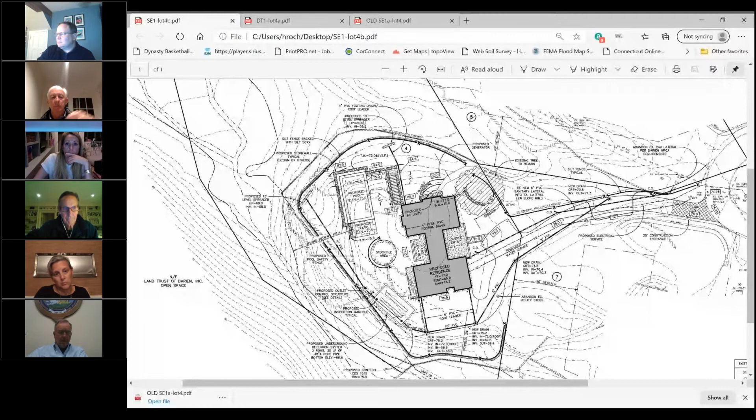But Harry Roachville, I see, is here. Questions? Hey, Harry, can you give us like a 2-minute on this? Sure. Would it help if I share my screen, or you just want me to go over it verbally? Well, if you could share your screen, it'd be great. Yeah, do I have that ability, Fred? Just give me one moment, Harry. Yep. Let me know when you can see it. You should have control. There you go. We can see it. Okay.

So essentially there were two changes, and actually I'll show the old one first. So there was an existing retaining wall right here. Can you see my cursor moving as well? Yes. So there was an existing retaining wall just north of the house, and they were proposing to remove portions of it, but as they got into the site clearing and investigated a little further, it was determined that wouldn't be the best idea. So the house moved 10 feet south, essentially parallel to where it was, to avoid having to remove that retaining wall. It didn't encroach, and I'll go to the new one. It didn't encroach on the upland review area at all. And it was just about a 10-foot shift.

And then the driveway, same thing, it shifted 10 feet with that. There wasn't any increase in impervious area for that same exact footprint. So the stormwater management system stayed exactly where it is, no changes at all. The other change was the pool shifted to the northwest about 20-25 feet. That was to better fit the existing conditions of the site after trees were cleared, and as you know, there's a lot of ledge out there. So it was found that if they shifted it that direction, there were going to be retaining walls proposed anyway, and they could use those retaining walls as a sort of double infinity edge for the pool as a nice feature for the property.

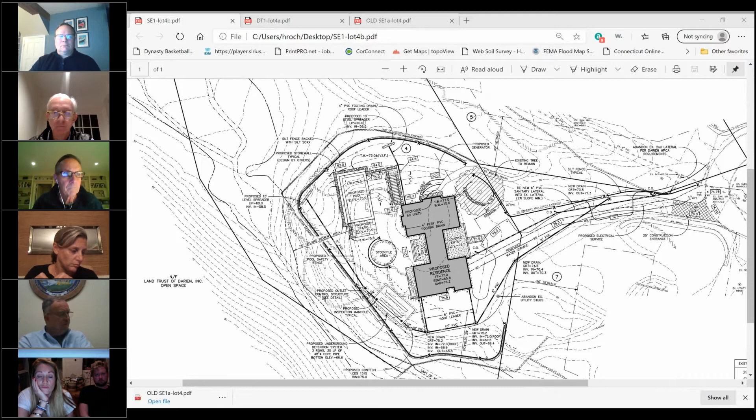Okay, Rich? Okay, now we're going to move to public hearing, EPC 2020. Megan Thornton and Eric Roemer, 49 Birch Road, proposing pool house and patio construction in the upland review area. The site is shown on assessor's map number 11 as lot number 11. The hearing was opened on September 2 and immediately continued.

Okay, is there a person representing the applicant? Yes, Jan Goshinsky, Enviro Protex. With me, I have Doug DiVesta, who's our civil engineer, and Alex Mock, who is our environmental scientist. And I also have the owners watching here too. So I'm going to take you through quickly what we're planning to do, and then if you have any questions, we'll be glad to answer them.

So the basic idea is to put a swimming pool there in the backyard. Their yard is divided by a stream, and a large pond is also on their property. The pool itself sits within the required setback lines. We're okay with the coverage. We're okay with the setbacks. So with any of the proposed activities, there's nothing we have to do with planning and zoning. There's no real regrading here, and Doug is going to take you through the civil engineering plan.

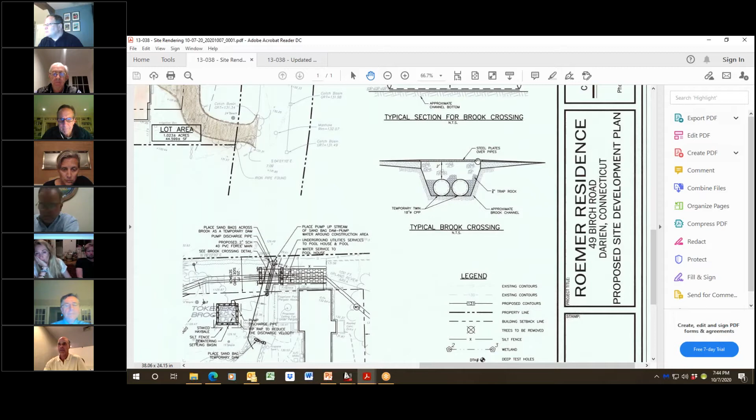Again, we're looking to construct a pool in the western portion of the site. To get there, we would have to cross the Tokeneke Brook. What we're proposing to do would be a temporary crossing, which we have details for. This is the temporary crossing detail, doing twin 18-inch pipes with stone around it and a minimum of 2 feet of cover over the pipes, and then a steel plate on top of that to allow the heavier equipment to go across it. So that's a section of it.

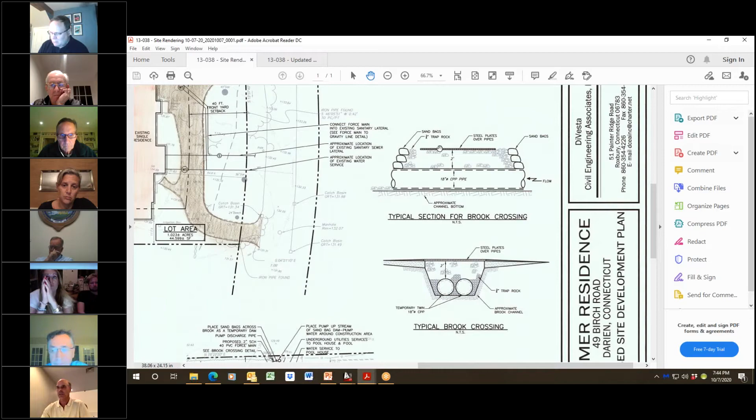This is a profile looking along the longitudinal, north to south, on the brook itself. Sandbags on the side to hold the rocks in place there. I think Joe made a comment about adding a geotextile fabric along the inside of here to keep the stone in place in case it does flood out on us. So that's a proposal that we certainly can do as a condition of approval and revise this detail for that matter.

So again, the pool itself is in the back western corner of the site there, with minor regrading to get the pool level, using a boulder retaining wall here, about 1 to 1.5 feet high, to keep the grading from going out and closer to the wetlands.

In terms of drainage, we are looking to put channel drains on each side of the pool patio area and around the pool house that will all go into a Cultec system. Before it goes into it, it goes to a junction box with an open bottom that will allow any sediment to settle out for cleaning purposes. And this will also handle the 2, 10, 25, and 50-year design storms, and also handle the water quality volume for the impervious surfaces from the patio, the pool decking, and the pool house itself.

In terms of erosion control, we're showing double row staked silt fence with hay bales right along the wetlands line. Also, we're providing silt fence on each side of the brook itself with an anti-tracking pad leading onto the existing driveway. And then during the weekends and storm events, we put hay bales across the entrance to the construction on both sides to mitigate any potential erosion towards the brook itself.

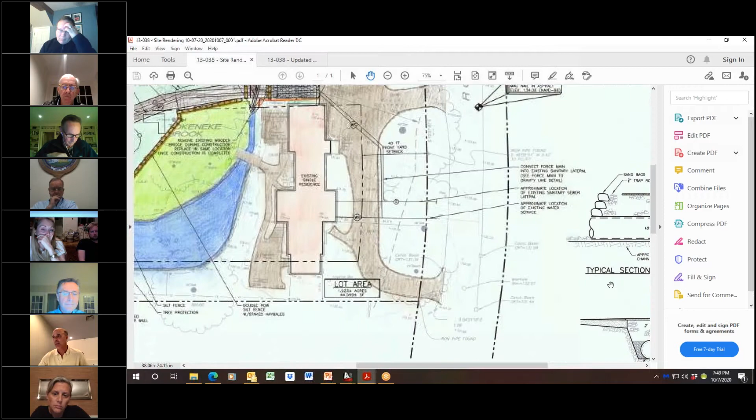Then Joe had asked us about the crossing and to design it according to the ConnDOT drainage manual for temporary hydraulic facilities, which we did, and that goes back to our details here, and those details follow those requirements. We also looked at the design of the flow. These are twin 18-inch corrugated plastic pipes, and we looked at the flows going through there based on the design manuals for our 2-year design storm.

The 2-year design storm flow is, one second, let me check my numbers. The 2-year design storm is 2.9 CFS. One of these pipes can handle 12.5. You put twins in there, you can handle 25 cubic feet per second. So we've got plenty of capacity to pass the 2-year storm.

We also looked at the 10, 25, and 50-year design storms, and each of those storms can pass through the twin 18-inch pipes there. Again, it's only temporary, it's only there during construction. Once the construction is over, that will be removed and the area will be restored back to its existing conditions.

Joe also had asked us to provide a location for the wooden bridge that's there right now to bring in lawnmowers and things like that to access the backyard for cutting the grass. We showed a temporary storage area for the wooden bridge during construction, and that bridge will be brought back to cross the brook itself. So that pretty much addresses Joe's comments.

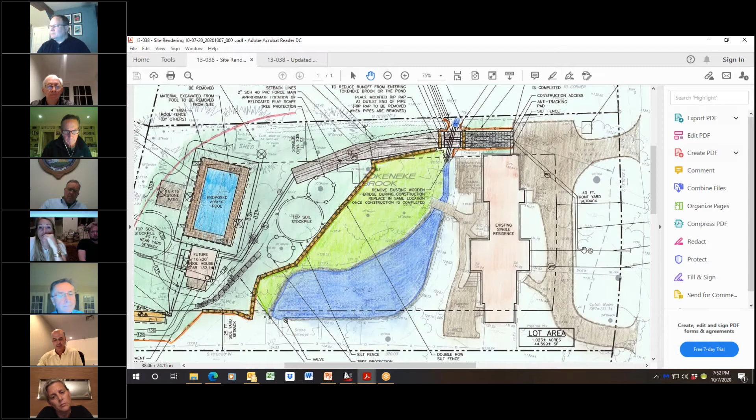We included the utilities, electric and water service to the pool house, and connected that to the existing utility services. We removed the retaining wall we originally had on the plan and provided a lower boulder wall, and just slope down to the top of the wall on the south and east side of the pool itself. We added additional tree protection around this 20-inch maple.

We also added a second stockpile area. We had one on the east side. Now we added one more on the west side, just due to the amount of material that would be stockpiled there temporarily during construction, mostly topsoil to replace back where it's being disturbed.

We added the second row of the detention system to help provide the water quality volume, as we just talked about. So that pretty much addresses Joe's comments and goes through the changes that were made in the plans. And I think we'll have Alex give us a little presentation regarding the environmental assessment of the property and the proposal here.

Alex? Good evening, this is Alexandra Mock. I'm a wetlands and soil scientist, also a landscape designer, and I would like to discuss wetlands a little bit. This is a wetland watercourse corridor associated with Tokeneke Brook. This area is highly manipulated by past human activity.

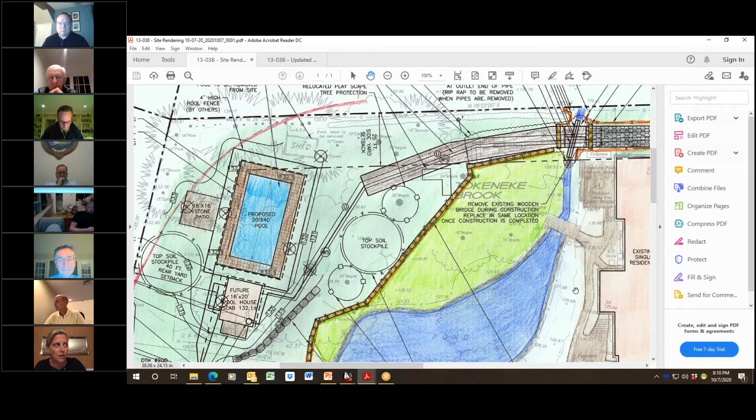Okay, please go ahead. So I just had a question on the utilities now being installed, now that we see the sewer main and the water. How is that going to disturb? Because I understand the access point and the temporary bridge, but the sewer lines are not temporary. So what steps are being taken during the installation to preclude sediment and unnecessary disturbance in the wetland? I understood Alexander's point on the plantings afterwards, fortifying the bank, but I'm just curious what the impact is on installation.

Is this the question for me? Probably Doug will be better to explain, but there will be two types of addressing issues. When the utilities are going to be dug into the channel, there's going to be a sump pump, which is going to be taking the water from the northern end of the bridge or crossing. The water is going to be sucked out clean, and then a pipe is going to take the water to the other side of the crossing, and the water is going to be discharged there.

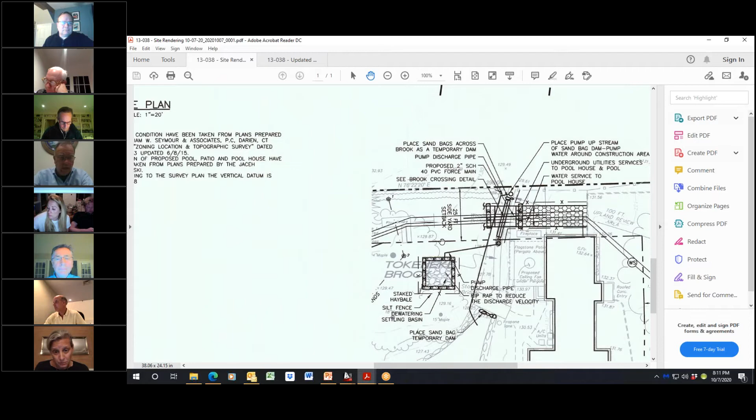So the water is not going to be flowing through the disturbed area, it's going to go around it. This way we can maintain the good quality of water while we're doing this whole disturbance. Right, thank you. Okay, thank you. Anybody else from the commission? Okay, Joe? Wait, whoa. I have some questions, Eric. Okay, please, Gunnar.

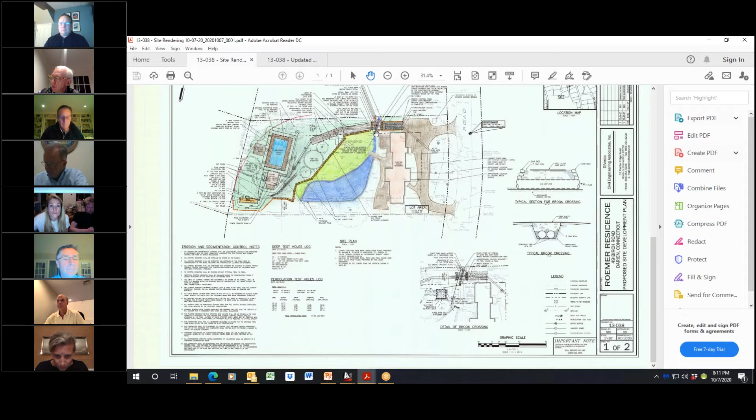So where the bridge is, and you're going to be going across that bridge, does that typically in a big storm totally overflow, or is it adequate enough to handle the water flow? Even in a storm condition? It was designed based on ConnDOT's hydraulic temporary crossings. It was designed for a 2-year storm, but we also checked it for the 10, 25, and 50-year design storms, and the twin pipes in there have the capacity to handle up to a 50-year design storm and beyond.

Okay. I don't know if we're at this point, but I have a question. Have you ever considered, instead of putting the future pool house where it is, relocating that up to the 16 by 16 stone patio just on the west side of the proposed pool? The reason being to get that further away from the wetlands. That we can't do because that would be within the building setback lines. The pool and the pool house have to be within the building setback lines, and that would be outside the building setback lines. Okay.

I know we've already talked about the pond, but has it ever been dredged? Is there any history that it has been dredged at any point in recent history? I worked on this project back in 2013. At that point, the pond had not been dredged either. So for the last 7 years that I've known, it has not been dredged. The owners are on this call as well. I'm not sure how long they've lived there, but they may be able to give us an idea if it's been dredged since they've been there. I don't believe it has been, but we can ask them.

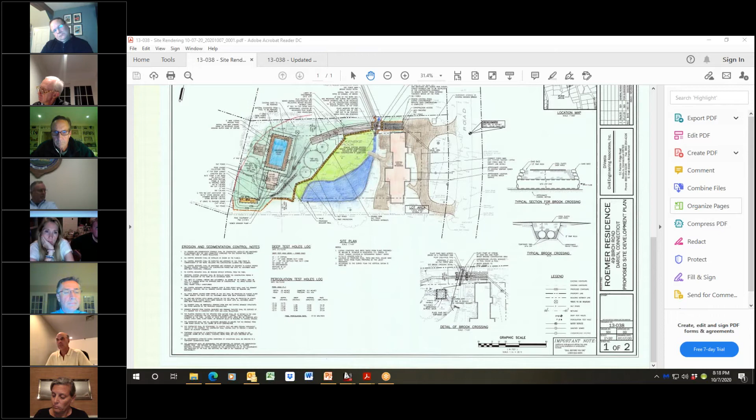Yeah, the building violation has been resolved. There are no zoning violations. The subject of the application is to keep a section of terrace that's shown in gray, but that is not a zoning or building issue. That's an EPC thing. Correct. It's being requested to maintain it as part of this application. It was built, I think, when the fireplace was built, or in the same general time frame. So the answer is there are no building violations or zoning violations.

Does that answer your question, Michael? Yes. My only other question is, is there an alternative to pass the utility and the sewage ejector lines without going through the pond or the outlet at the northerly boundary?

There is no other way to get the sewage over there, nor the water over from the east side to the west side. This commission has approved in the past crossing brooks and water channels like this before. The most current one would be over on Valley Forge. We had a force main going under the brook from that pond there out to the septic area in the back of the property there.

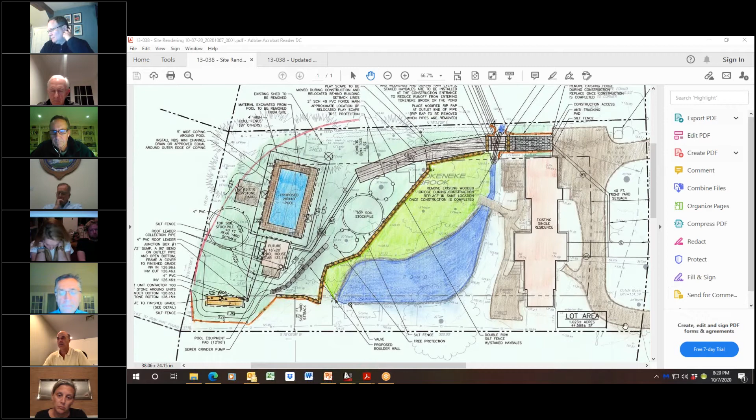So this is something that's not unusual, and all precautions are made as discussed with my detail on the plan and what Alex talked about, by damming up the water, pumping the water around during construction, and keeping the crossing dry during construction itself. So this is not something that this commission has not seen nor has not approved before.

Out of curiosity, is that for an accessory structure in a pool or for a dwelling? That was for a single family residence. Again, it's sewage, whether it's coming from a pool house or coming from a residence, it would be the same. I mean, that's all I've got. I'll jump in, I'm sorry.

I was going to say that the pipe is pressurized and it's encased, so it will not leak. It does not leak. I mean, there are pipes throughout the whole town that are pressurized. Not everything flows just downhill, so it's not, again, something unusual. It's pretty good construction.

Oh, I think there was actually, just jump in one last time. Maybe Jim had mentioned this, or Gunnar, is whether the pool house was planned to be constructed now, or if that's something for later. Okay, so let me explain that. So the idea here was that we would use this temporary crossing to do all heavy construction and build a pool, the deck around it, bring in all the utilities so they can actually use the pool.

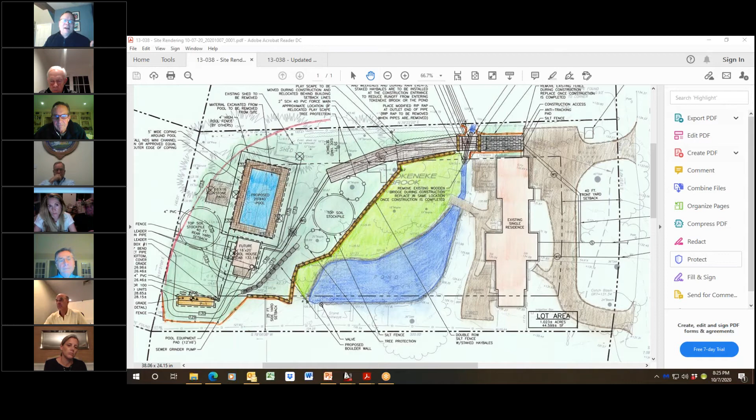I did request that Doug add an additional 2 feet of stone on top of the pipe, just to make sure that they do have the strength, so that the load as the construction vehicles pass over it is distributed to the ground below it instead of directly on the pipe. I saw a situation in Danbury once where there was an insufficient amount of cover over those pipes. There wasn't enough stone over it, and those pipes started to deflect, and they could collapse. But 2 feet for this size of pipe is certainly sufficient.

The DOT guidelines specify based on what's called the design risk, which is the procedure that you develop as part of the design of this, and for the time that this would be in service, a 2-year design storm is appropriate. But as Mr. DiVesta said, it does pass the 50-year storm, which is great.

Also the utilities, that was something else we had a concern with. Those are encased in concrete, which again is a typical detail to prevent any sort of seepage. So that's in accordance with standard engineering practice. So that said, the applicant satisfied our comments on the stormwater and the erosion control.

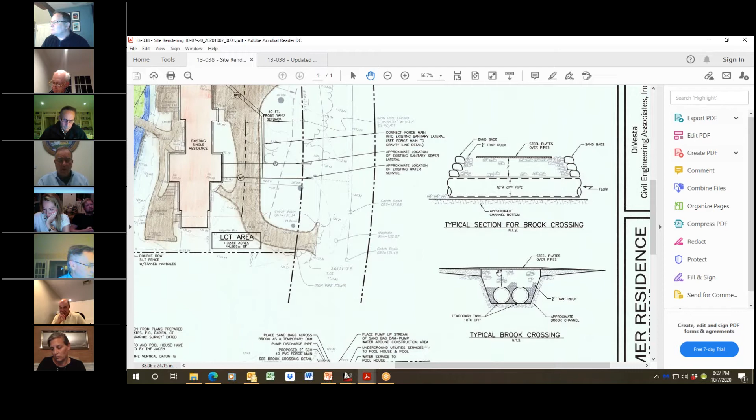Okay, hey, Joe, can I ask you a question on your point 6, page 3.6 of your letter? Yeah. You say stream crossings are also subject to the jurisdiction of the U.S. Army Corps of Engineers, et cetera. And the electric, because what Doug DiVesta referred to at Valley Forge Road was essentially water, which is not electricity. Okay, putting a pipe underneath the stream and piping sewage, essentially piping black water up to a leaching field.

Clearly the pool house is going to need electric. How does this electrical connection work? Because I was always understanding that you can't put electrical wires along the ground for obvious reasons. Well, for the electric, they're going to need the power, right, for the pool equipment. Correct. Right.

So you could run the conduit in that same trench. It has to be about a foot away or so. There's no gas service, otherwise you'd have to be 3 feet away. But I don't see any reason why you wouldn't be able to pull cable through there. Okay, because I always thought that crossing a stream or something like that requires Army Corps of Engineers approval.

You're familiar with the approvals that are necessary, and particularly because I always thought the electrical cable had to be overhead or underground, or deep underground. No. It could be standard burial depth. Sometimes, if it's a fast-moving stream or if you have a large volume of water, scour might be a concern, like with bridges, if the water comes ripping through there. But that's not going to be the case here. And the concrete encasement would protect that.

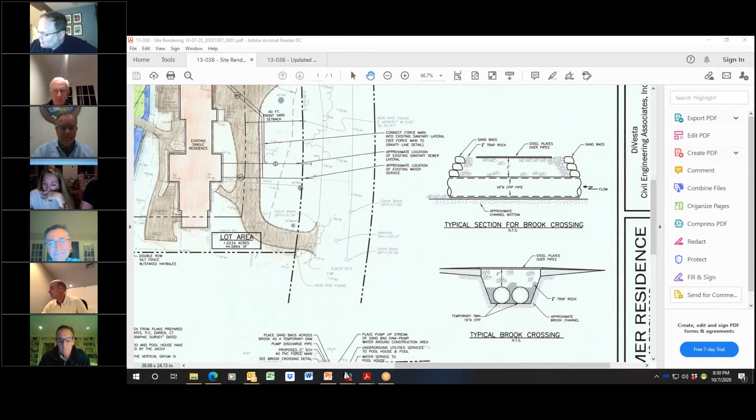Okay, then we'll open the hearing up to the public. And now, yes, you can, Mr. Maslin. Robert, do you want to? Yeah, sure. My turn. Let me just make sure I got the right screen up here. Wrong one. Hold on 1 second. I have a PowerPoint, and I want to make sure you're on the right screen.

Let's see. Okay. Can you see the PowerPoint that I have up? No, we can't. No. I think. Let me go down. Hey, Fred, could you give Robert control? Yeah, Fred's got to give me control. Okay. Here we go. How about now? Yes, we can see it, Bob. And it's the regular screen. It's not the... It's just got one slide on it, nothing else, right? It doesn't have all the management tools on it. That's correct, Bob. Okay, all right, thank you.

Good evening, everyone. My name is Robert Maslin. I'm the attorney for the neighbors to the north. They abut the property. They're Robert and Karen Plunkett, who are here somewhere in this meeting. As I said, they are at 51 Birch Road in Darien, and their property abuts the area where this crossing is going to occur. I have several slides here that I'll run through, and I guess they want me to do most of the talking, so they're here if you have any questions that I can't answer.

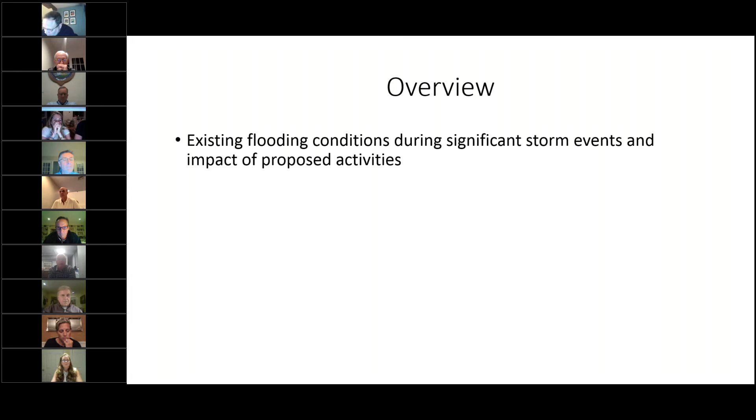So we'll start with an overview of what I'm going to be talking about. First, I have a couple of videos. They're very short, only a few seconds, of existing flooding conditions that occurred in 2018. By chance, one of the Plunketts went outside during the lull in the rain and actually videoed the storm conditions, particularly the flow through their front yard. And you'll see quite graphically what happens during major storms.

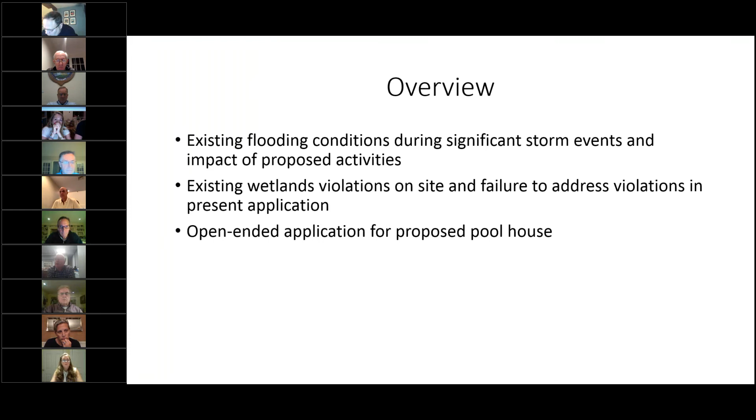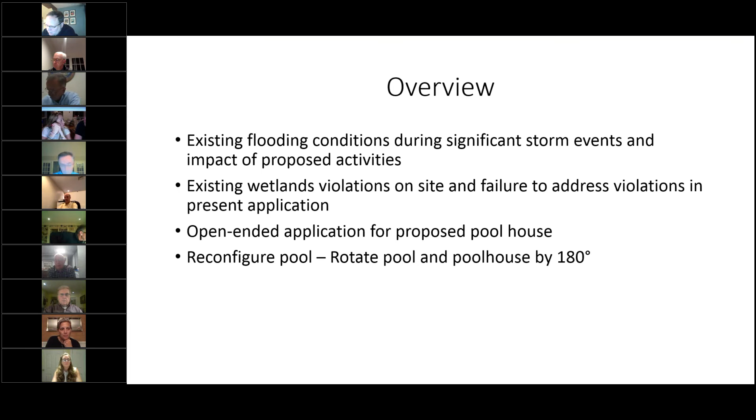There are several issues on violations. I know you talked about them before. I have a couple of specific ones on the slides that I'm going to talk about eventually. We have an issue with the open-ended application for the proposed pool house that I'll address along the way. And what I'll wrap up with is an alternative. As you know, when you are dealing with significant disturbances and significant activities, one of the things the commission has to consider, and the applicant should also discuss and consider in terms of designing the plan, is alternatives. And I'll get into that when the time comes.

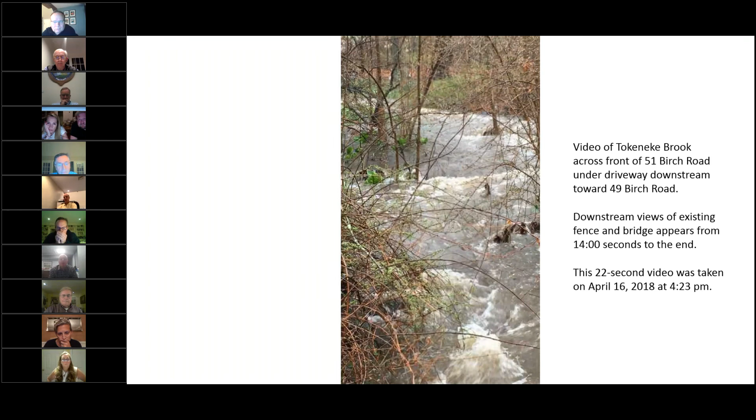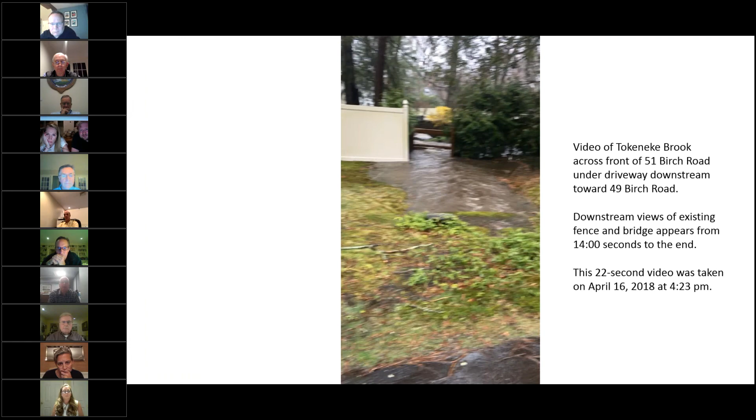Now, on the slide here, I have to figure out how this is going to work. This is a slide that has a video built into it. I started it. It may seem jumpy, but if you download this PowerPoint presentation, you'll see it in a much smoother flow. This is really a 22-second video that shows the water flows, and I'll stop it right here. This is downstream into 49 Birch Road.

There's a solid fence that's into the water flow. This little structure here is the existing bridge. You can see the water's right to the top of it, or the underside of it, I guess. And there's a railing up here, and then it continues to flow. This is significant because I'll show you the weather observation data two slides from now. But this has to do with the question of whether these culverts are going to be sufficient to handle stormwater if and when it happens while construction is underway.

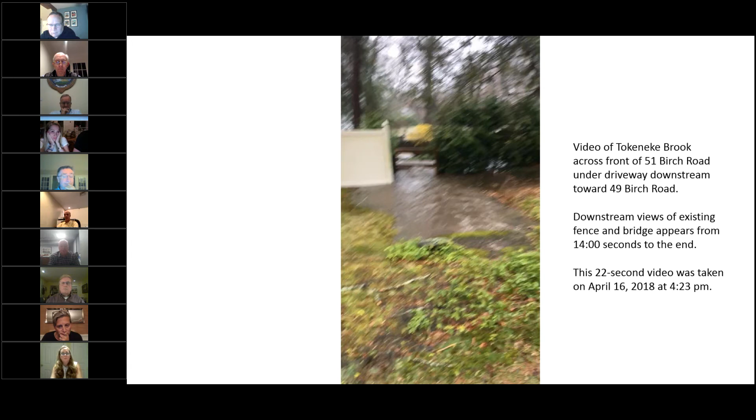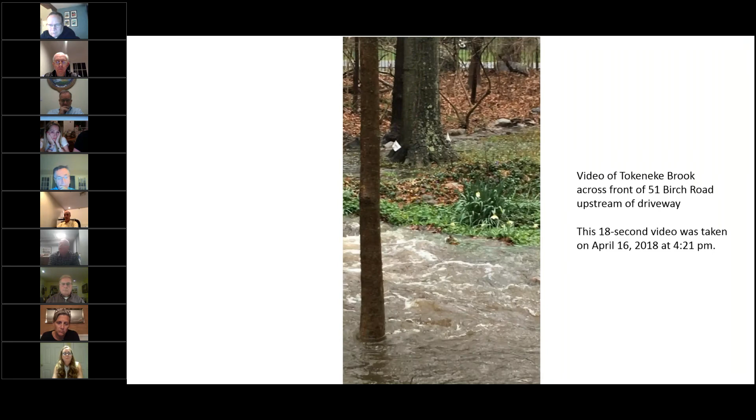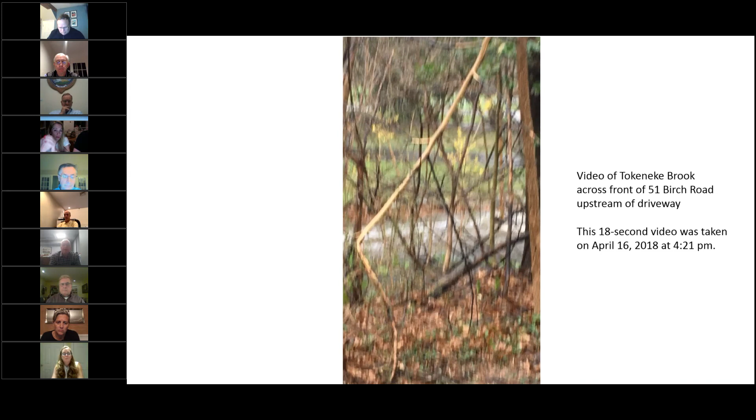This is another video, same storm, April 16, 2018. And you'll see rushing water across the front of 51 Birch Road, the Plunketts' property. As I said, if you download this video, which should be available probably tomorrow, I guess.

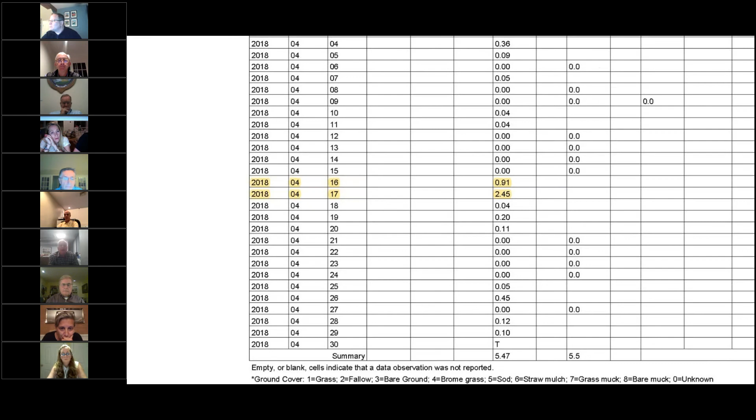You'll be able to see it in a much smoother video. Now, this slide here is the record of climatological observations. It's basically NOAA, National Oceanic and Atmospheric Administration. It's a record of the rainfall in April 2018. These two videos were taken on April 16th. The 24-hour observation showed a total of 0.91 inches.

And that was the volume and velocity of water that was running across the Plunkett's property toward 49. The next day, the 24-hour number was 2.45 inches, a much bigger storm. So if you look back and you think, well, mid-April 2018, that was a huge storm. Yeah, it was, but the video was taken after less than an inch of rain had fallen.

And so I mention this because if you want to know what the actual flow is during a less than 1 inch storm, those videos actually show it. And it's pretty darn close to overtopping that footbridge. And it tells me that it's really doubtful whether those 2 pipes are going to be able to handle the actual flow. I don't know what the engineering explanation is. It may have something to do with the fact that there's direct drainage coming from the street at several locations and being piped directly into Tokeneke Brook.

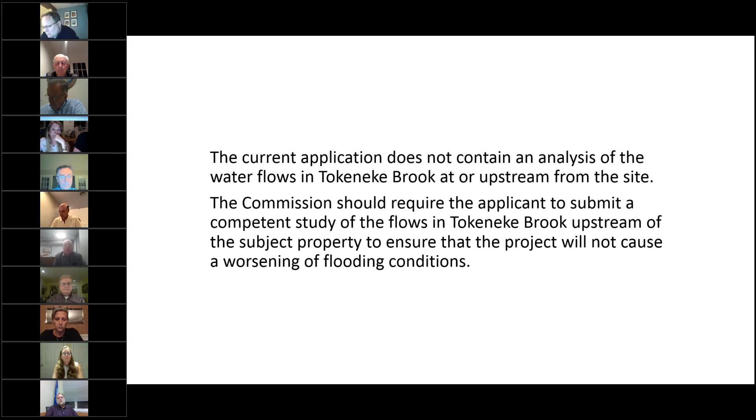I don't know about that. I would really suggest that they take another look at this. And hence the comment, the commission should require a more complete or competent study of the flows in Tokeneke Brook. Now, off to the next section, existing violations.

And I have a list of them here, and I'll show you them more graphically in a couple of slides as we move forward. The patio at the southern end of the property, that's not the one that was discussed during the applicant's presentation. This is the one at the south end of the property. That was enlarged, and a barbecue, maybe not as big as the fireplace on the other patio, but nonetheless a permanent barbecue was installed not only in the 100-foot upland review area, but also within the zoning setback. So that we think is a zoning violation, and it has not been either noticed or addressed.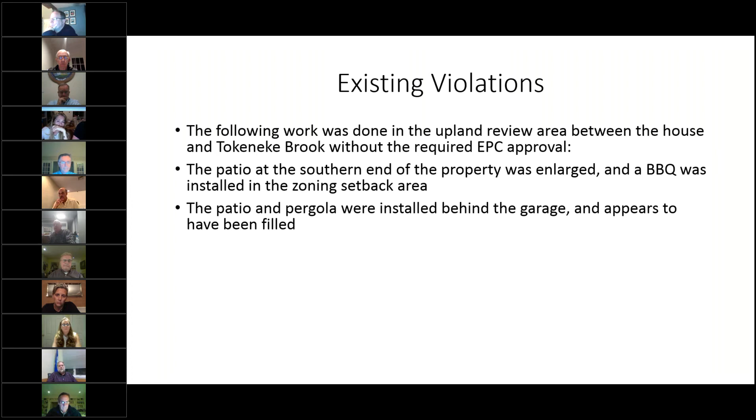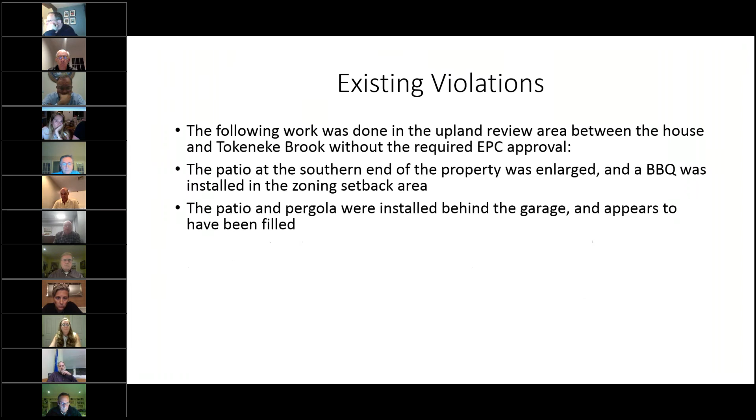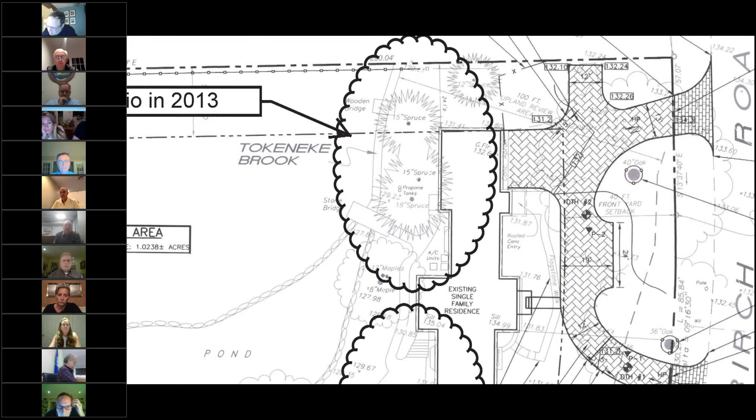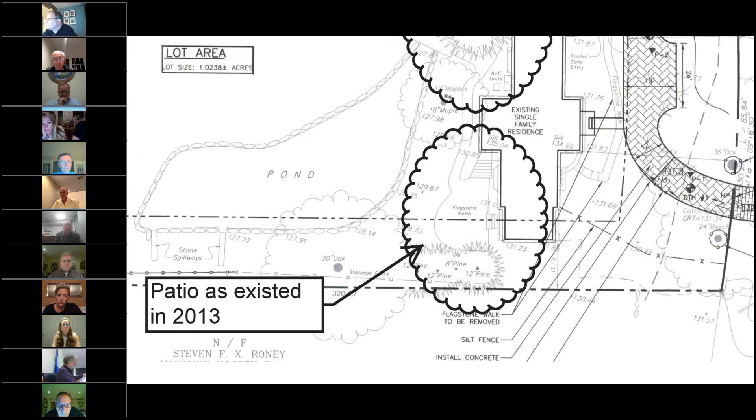And what I've called out here is there's no terrace up here. There's a couple of significant trees. And the patio, which I'm going to show you on the next slide, was nowhere near as big as it is today. And let me just start with this close-up: trees with no patio. And then when you look down here, this is a smaller patio than what's there. I'll show you what it looks like in the next two slides. So that's the starting point.

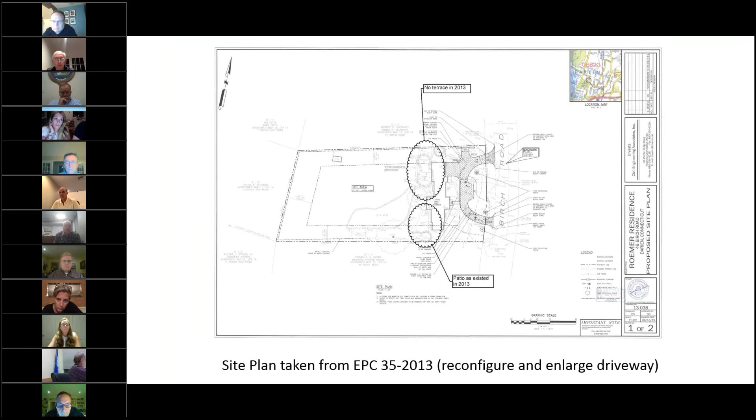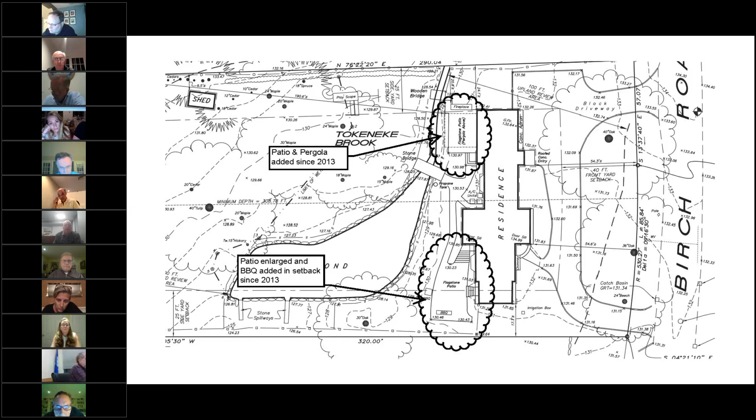And by the way, just for the record, these two slides were from the 2013 application, EPC 35-2013, and that was for the driveway. This is the current application, and I have it enlarged, and I'll enlarge the enlargement a little farther. We now have flagstone patio, pergola above, fireplace, we know that's been removed.

This is why we believe this area where the flagstone patio is was filled in and the contours raised up. There's a set of steps here, 1, 2, 3, or 4, depending on how you count them. And if you figure 10 inches or so, that's a pretty significant increase in the elevation. It looks like this is straight across here. There might be a step. Not sure. We haven't been on there to look at it. But this was done with no permits at all.

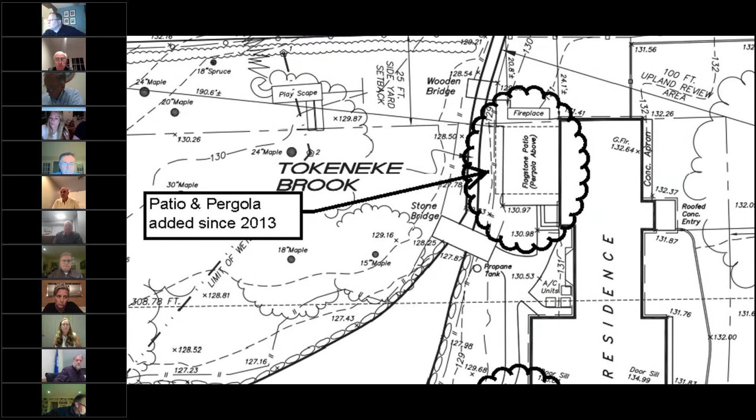And for some reason, Rich said that the owners asked permission to take the trees out. And he approved that administratively because they were not in good shape. But they didn't ask for permission and did not file an application for this. This is very close to the water course here. I don't see anything here unless it's underground. I don't see anything for stormwater management, water treatment before it flows from the patio into the brook. If you go to the south, you can see this new barbecue is down here.

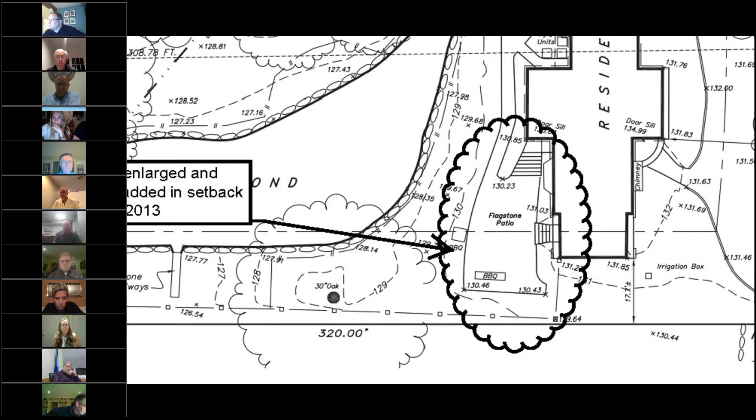This wouldn't be on the survey if it wasn't a substantial structure. Then you can see by looking at the outline, it's a larger outline. This was enlarged. Again, it's well within the upland review area. The upland review area ends on the other side of the house, close to the street.

So where that leads us is you should require that the applicant submit an after the fact application with the supporting documentation that you'd usually see, stormwater management and treatment, because that wasn't in, and I haven't seen it in any of the application materials that we've seen for this current application. And not approve any new work until this previous work has been addressed.

The open-ended pool house: as I understand the statute, there's a 5-year expiration on wetlands permits, but it also requires that work be done once it starts. It's to be done within a year. I've heard mention of 2 years. I know the commissions have some leeway. In this application, there should really be a commitment one way or the other.

I don't think it's appropriate to say, well, we're just going to put a slab in, because the slab doesn't have any stormwater management. It's just got sheet flow off the side of it. There's no provision for dealing with that the way you would have it with an actual pool house with gutters and downspouts flowing into an underground system.

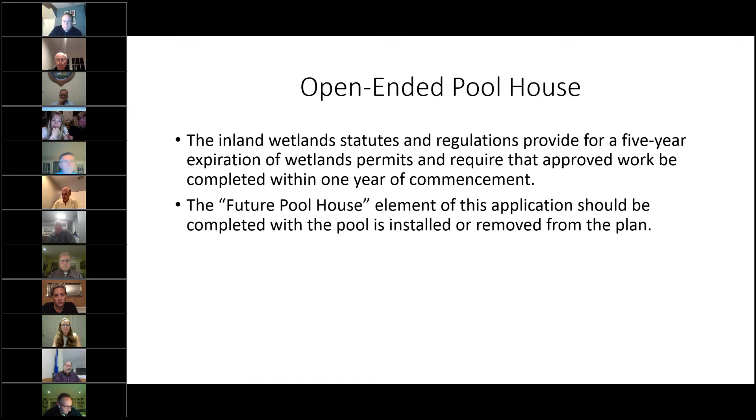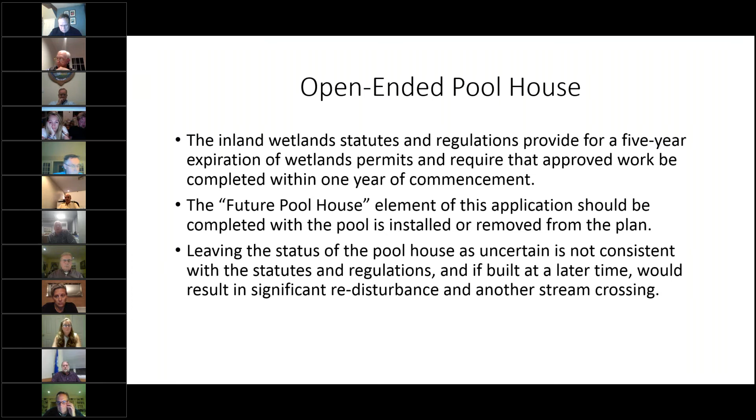So I just make the closing point on this section of the presentation. Leaving the pool house uncertain is not consistent with the statutes and regulations. Moreover, if the pool house is actually built at a later time, we don't know what changes they're going to want to make, and there'll be another redisturbance, possibly another stream crossing if it's a new application with a whole different plan that requires some additional groundwork or earthwork. And that's our section on the status of the pool house.

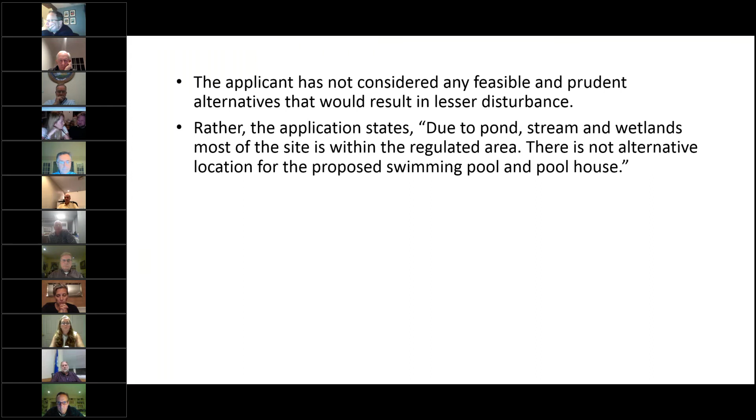Now, as you know, you've heard this many times, you consider alternatives. I didn't see anything in the application materials where the applicant has considered feasible and prudent alternatives that would result in lesser disturbance. All it says is, due to pond, streams, and wetlands, most of the site is within the regulated area. There is not alternative location for the proposed swimming pool and pool house. Kind of begs the question, do you need to do this at all? But we know that you're willing to consider people's applications when they come in.

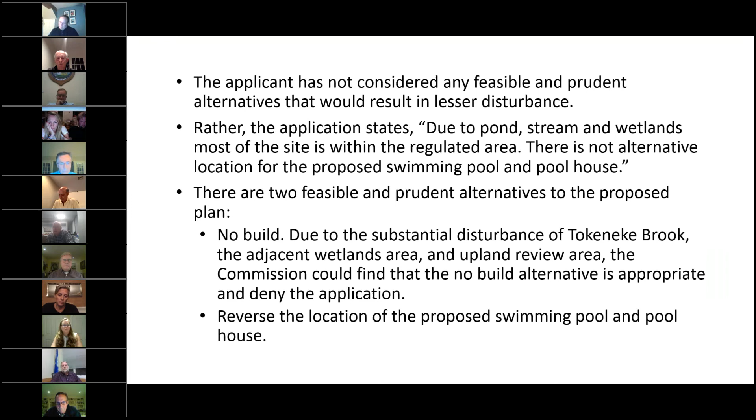But no build is always a consideration. Whether it's feasible and prudent depends on the circumstances. And I think somebody made a fair point earlier. A stream crossing similar to this was approved for a single family dwelling and not a swimming pool and an accessory structure. But the other alternative is just reverse the location of the swimming pool and pool house. And I'll show you that here. This is what we have in mind.

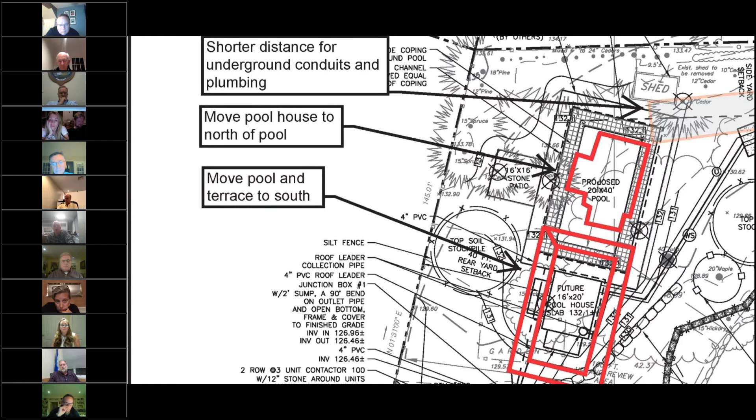First of all, the way this is configured right now, the pool house is out off the south end of the pool. That means it's going to cast a shadow across part of the pool and part of the terrace. One of the benefits of reversing these two structures is you will have a smaller structure, meaning the pool house, a smaller footprint, toward the north; you would have sufficient area for the pool to the south. Depending on how this is wiggled around a little bit, Doug might have to reconfigure this stormwater system here a bit, but it doesn't look like anything insurmountable or impossible.

And what you wind up with when you do this is a pool house that's going to be in the sun without casting a shadow on the pool or the terrace. But from an environmental standpoint, look what you wind up with here. Instead of running the conduits and the plumbing clear across the backyard to a structure back on the south end, you just run it straight up here. It cuts the distance down considerably. It reduces the amount of trench work that needs to be done.

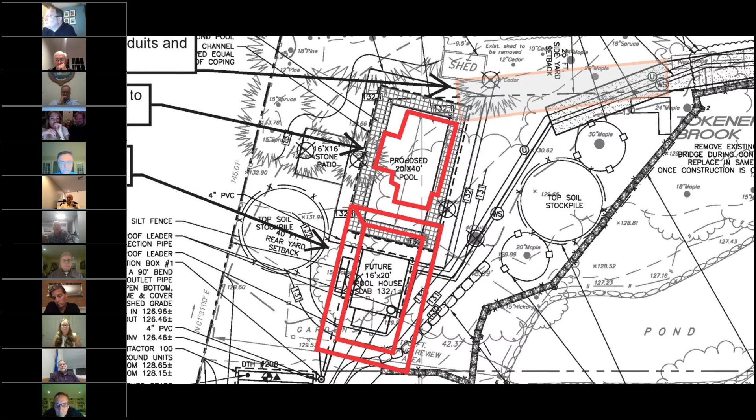And it's a much more environmentally, I think, responsible way to do this. And you end up with a better plan. And that's an alternative that we would like the applicant to consider and modify his plan accordingly and come back and see how that works out.

And I just want to mention one other thing that occurred to me while I was listening. I want to go back to the, okay. Oops. Okay. Has any consideration been given to running the access and the plumbing and everything up along the southerly boundary? Your crossings are here. They can be controlled. The access would not have to run across this part of the stream here. Rather, it could be done either over these two spillways or in some way that would coincide with that. I don't know physically what it looks like or whether it's feasible. It may not be, but if it's worth considering, it ought to be considered.

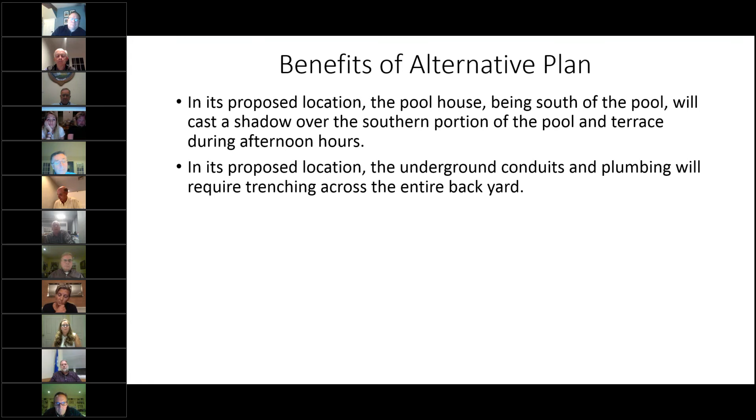Here are the benefits. The proposed location of the pool house, as I mentioned, will cast a shadow. The conduits require trenching across the entire backyard. And here are the two benefits of the alternative location. No shadow, and it reduces the distance that the conduits and the plumbing have to travel underground across an upland review area in the backyard. And this will also fit within the zoning setback lines.

What I did in my diagram here was these red boxes, I used, I guess it was Adobe, to outline the footprint up here of the pool house. And this bottom one has two rectangles connected by a little diagonal here. The inner box is the pool surface itself, which has to comply with setbacks, and the outer portion is the terrace around the pool. And you can see there's plenty of space for that.

The differences would involve, depending on how you settle this in, you just have to move this retaining wall back. This hasn't been built yet. Adjust the regrading here. You still have all your hay bales here. You're a little bit closer to the wetlands here, but you're eliminating so much more disturbance by rerouting the underground utility connections. This setback, this could actually go farther south.

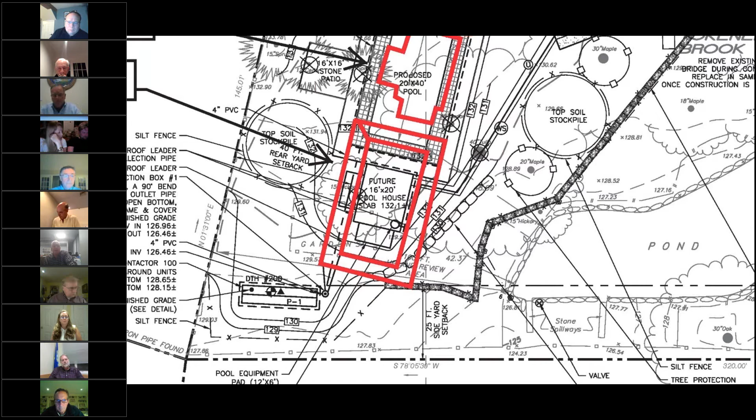The setback line runs along, let me get my little laser pointer here. Setback line runs along here and then here. And you can see there's plenty of room over here to fit the pool. So that's what I have regarding the alternatives. And if you just bear with me for a moment, I'll go through my notes here that I wrote while the applicant was speaking and going over the project.

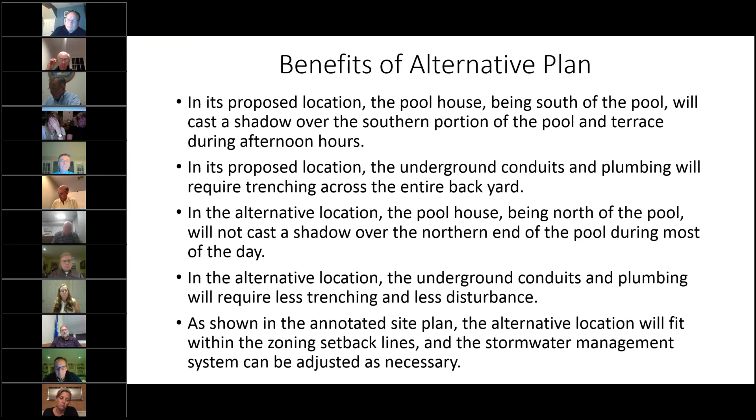One thing that I would want to point out, and I don't know what the zoning answer is to this, but regrading has to be at least 15 feet away from a property boundary. The grading down along this drainage facility here doesn't look like it's 15 feet away. And to the extent grading is going to occur up by the crossing, that doesn't look like it's 15 feet away from the property boundary. I mentioned that it might be little enough grading that it's exempt, but it seems pretty close, and zoning should take a look at it.

A question came up about dredging. My understanding of dredging a pond relative to stormwater storage is that dredging a pond does not necessarily create additional storage capacity. And the reason is water seeks its own level. And whatever the freeboard is, that's your storage capacity. And whether it's dredged or not dredged, if the level is the same, the storage capacity above the water level will remain the same. So dredging doesn't automatically give you more or less flood water storage capacity or drainage water storage capacity.

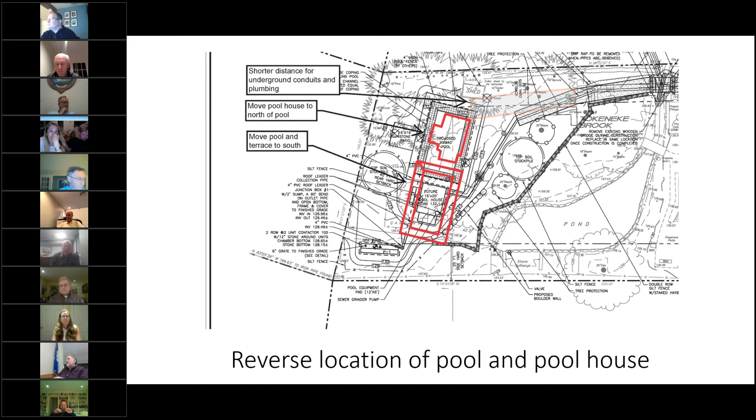That is, let's go down the rest of this. That's all I have. I've made the points we wanted to make, and if you have any questions, I'm happy to address them, or if you have any questions of the Plunketts, they're here to answer as well.

Thanks, Bob. I'd like to open up to the members of the commission. Do you have any questions for Attorney Maslin? I do. Bob, this is Jim Millard. Yes. I find your presentation thought-provoking.

Do we know, and maybe this is more for Rich Jacobson, do we know that the two dredging applications, I believe from 1981 and 2005, were actually acted upon, or were they just applications? Was there a permit and work done that followed on? Do we know? I don't know for certain, but Mr. Windells was dredging at the time.

I wasn't here, but I'd just like to point out that we don't require people to dredge their ponds. Right. This pond, I think, might be in need of dredging at some point, and there are methods that take out less silt, but they do work, like a hydraulic dredge, but we're not requiring it. And the town doesn't use road sand anymore.

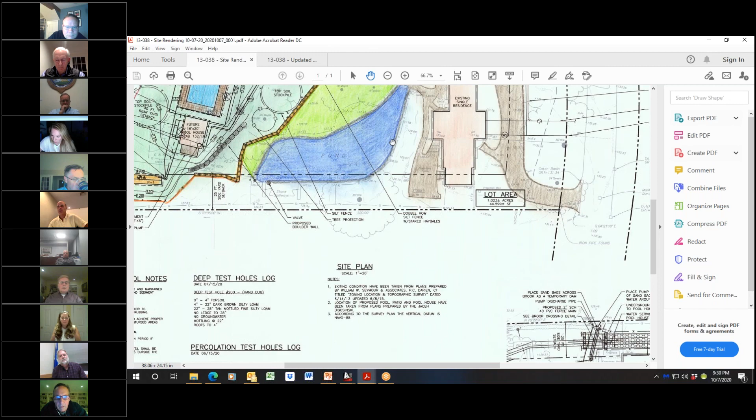But the main thing is getting the area between this 30-inch oak and the edge of the pond there would be difficult. And coming this way, like Jacek said, you come right up the road to the driveway, across the narrowest point of our brook, and then into the back. I have no doubt of you guys' capabilities and your care in looking at every angle. I was just asking. Sure. What now sounds like a dumb question. Anybody else on this topic before we move on?

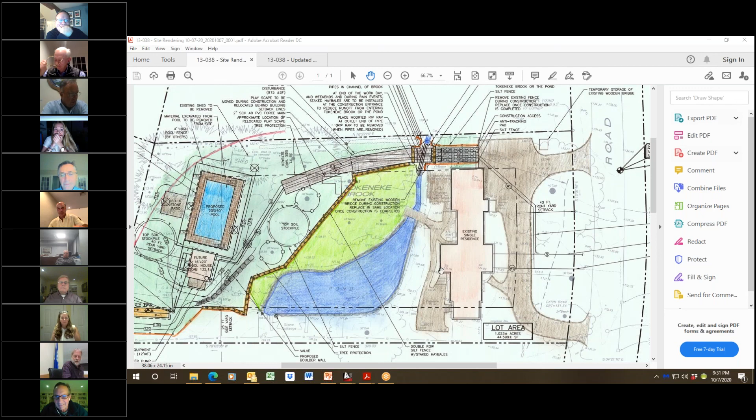All right, let's move on to other business. Discussion of stormwater management system. I requested this to be added to the agenda. What I'm going to do is postpone it for the November 4th meeting. The minutes of September 2 were attached. Do all the members of the commission have that? I did get Jim's comments. Okay, you got Jim's comments. Anybody else? Kelly, did you do your normal due diligence on this? Because I know I did, but I didn't send them to Rich yet, but I can, but I have every confidence that Jim has already caught all of them.

Well, if you could send them to Rich, I'd appreciate it. So, Jim, may I have a motion to approve the minutes of September 2? Yes, I'm happy to make a motion to approve our minutes from the September 2 meeting as revised. Great. Susan, can I have a second, please? I second the motion. Great. Without objection, then we'll approve these minutes.

And then there's no other business. So I'd like a motion to adjourn this meeting, Mr. Millard. I would like to propose we adjourn tonight's meeting of the Environmental Protection Commission. Great. Susan, a second, please. I second the motion. Great, thank you. And I need a vote on that, but I'm sure it's unanimous. So without objection, I will consider the vote unanimous.